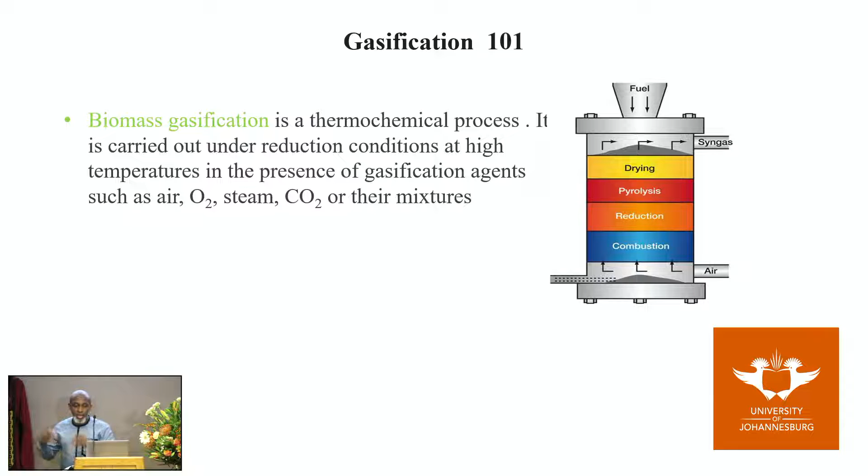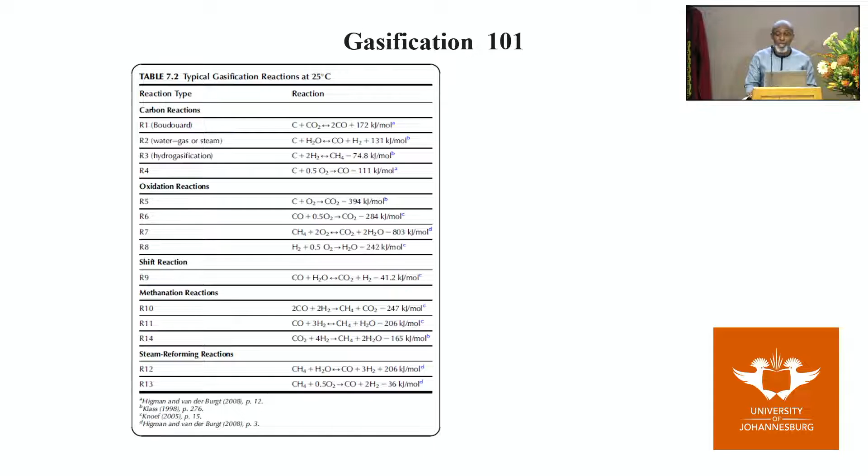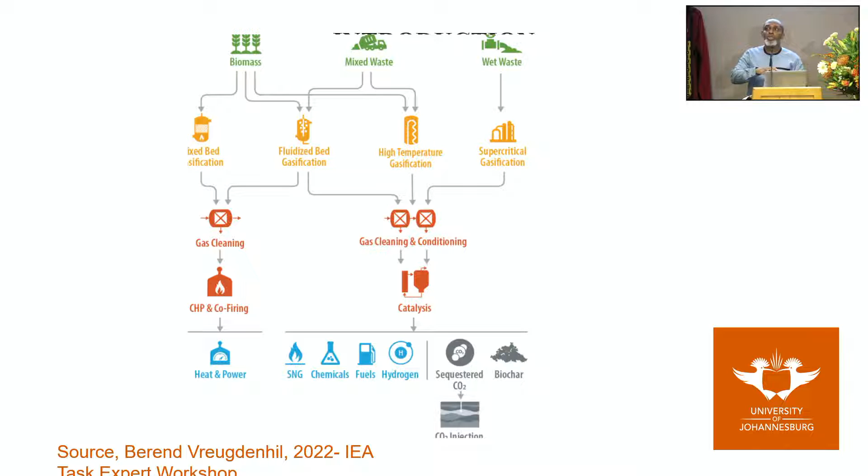There are a lot of reactions taking place in the gasifier: the carbon reactions, oxidation reactions, shift reaction, methanation reaction, and steam reforming reactions. And among the different types of gasifiers, the type of waste you have also dictates the kind of gasifier you select to extract your energy.

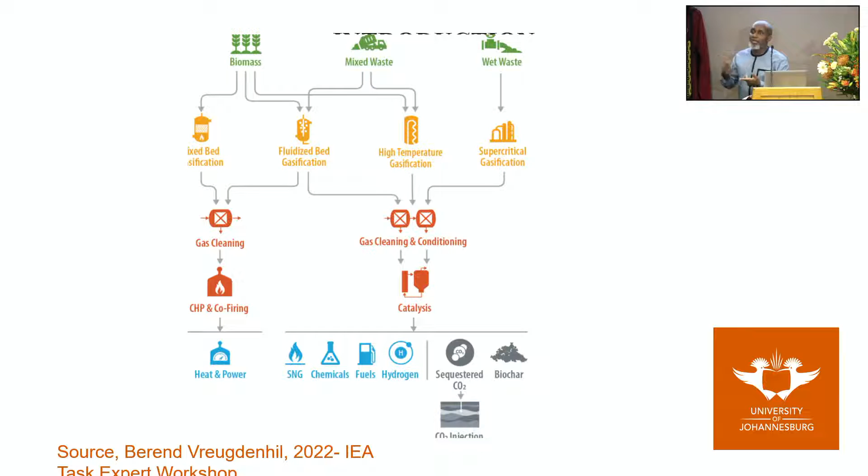So if you have pure biomass, you could use a fixed bed reactor or a fluidized bed reactor. If you have mixed waste, maybe municipal solid waste, you have paper, grass, plastics and everything, you could use a fluidized bed reactor or a high temperature reactor. But if you have wet waste, you use a supercritical reactor.

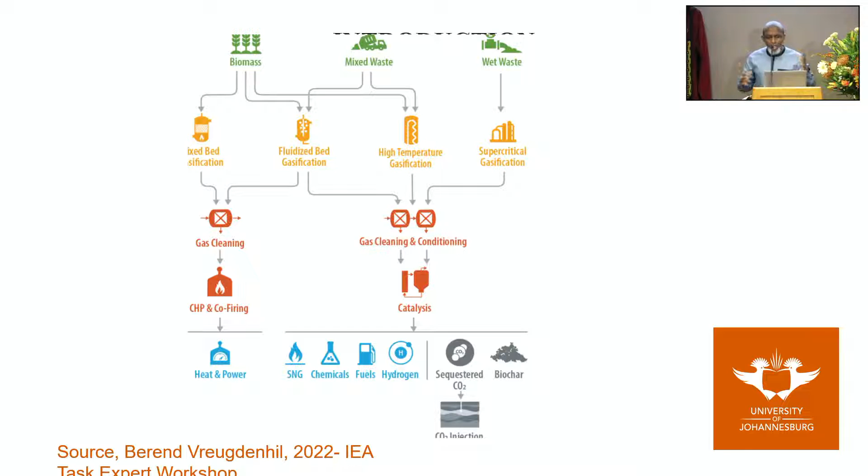And after you have gasified, the gas you get has a lot of impurities. You need to clean your gases, and you go through a gas cleaning process, a series of different processes. And that gas can be used for different applications. You can use it for combined heat and power, produce electricity, produce heat,

or you can use it to produce chemicals. You can use it to produce fuels, hydrogen, like the green hydrogen we're talking about. You can produce natural gas, and you can also capture your CO2 from the process. You can sequester it, or these days you can use the CO2 to produce chemicals.

The history of gasification and energy transition. Gasification has played a key role in energy transition for the last 200 years. In the early 1800s, gasification was used to produce town gas, which was used to light streets in London and also in North America and Maryland.

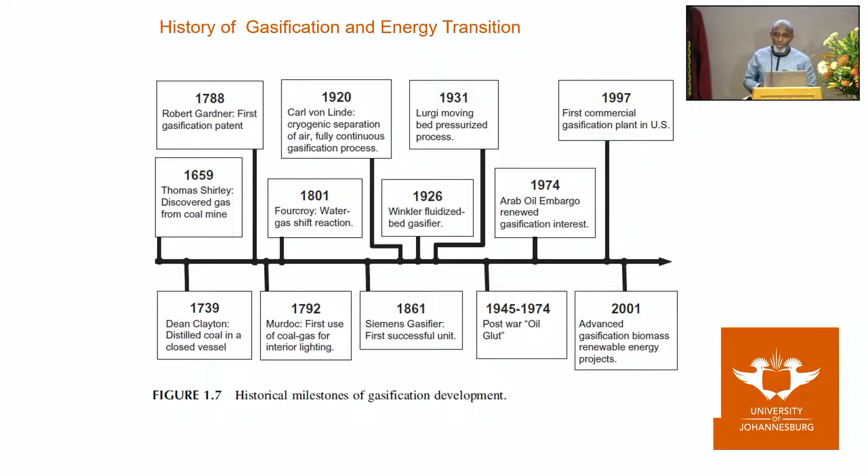After the internal combustion engine, gasification was also used to produce electricity. The product gas was used in the internal combustion engine to produce electricity. And during the wars, gasification was also interfaced with the Fischer-Tropsch process to produce transportation fuels. The syngas was used as a raw material to produce hydrocarbons for the transportation industry.

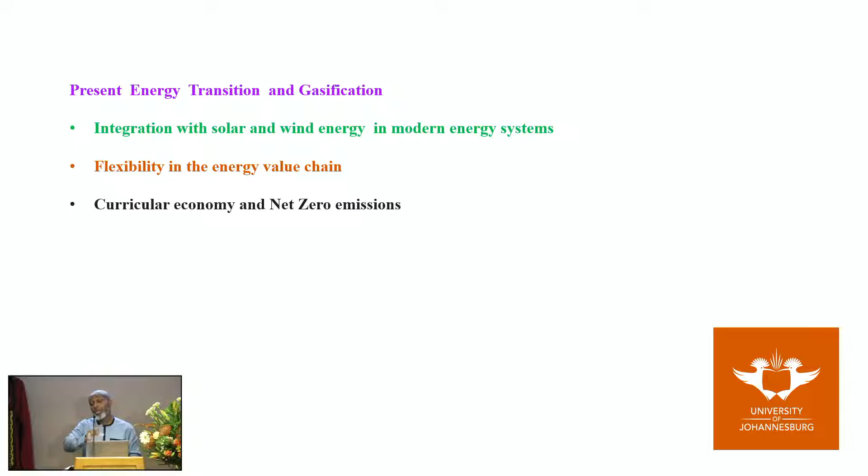And recently, gasification has also been adopted for biomass to produce renewable energy projects all over the world. And presently, the key one, which is the focus of this topic, is that gasification can be integrated with solar and wind energy in modern energy systems, either as storage or as a backup for load deficits, and also to achieve flexibility in the energy value chain, whether you produce electricity, heat, or gas. It can also be used to develop a circular economy and to achieve net zero.

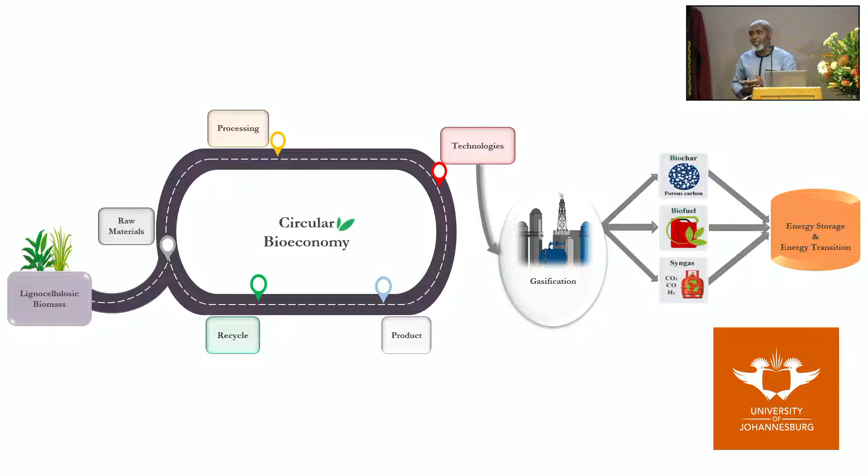In this case, the gasifier can produce what we call energy vectors, which have applications in different phases. It could produce biochar, which can be used for energy storage. It can produce syngas that can be used to produce electricity, heat, and transportation fuels. So that basically helps us to transition and be able to store energy, because variability of renewable energy is the key challenge in the penetration of renewable energy. So that transition will be easier, quicker, and cheaper.

So in modern energy systems like the one I've shown here, when you have excess renewable energy, because the challenge about renewable energy is that you produce so much, especially in the afternoon when you have so much sun, the demand is low. So generally, what a lot of people do, which is the easier way, is curtail it. You basically waste it, because storage technologies like batteries are still not at the level in terms of capacity. So there's a need for you to store to a very large extent. So power to gas is a very good concept.

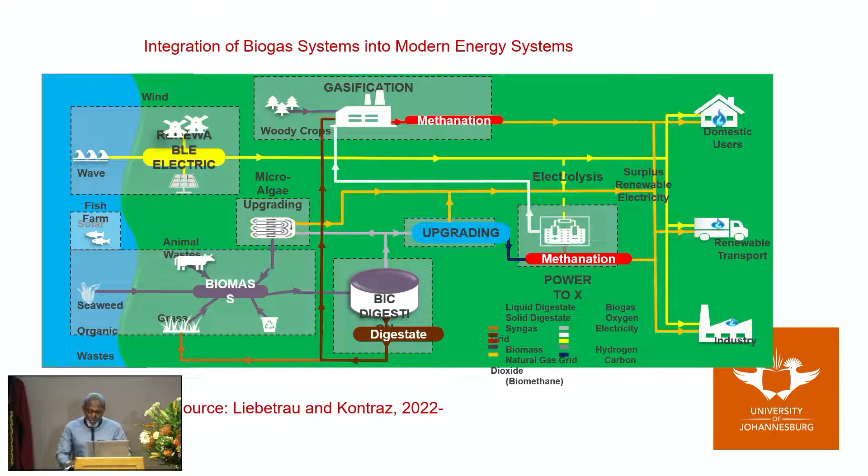So the gasifier can produce your CO2 and the hydrogen, so with the electricity you use to split water, you get hydrogen, and you can now store the hydrogen easier, or you can use it to produce methane, or you can use it to produce diesel or the liquid fuels. And these applications can be used for heating domestic users, or for transportation fuel, or as a heat source in an industry. It can also be used to balance the load.

Like you can see in that diagram that I showed here, that's the energy production and spot price in Germany, September 2022. You could see that the renewable energy load was not enough, so they had to balance it with electricity from a biomass gasifier. Or you can also use it to balance not only electricity but heat, especially in Europe where heat applications are in, and also gas in your gas grids.

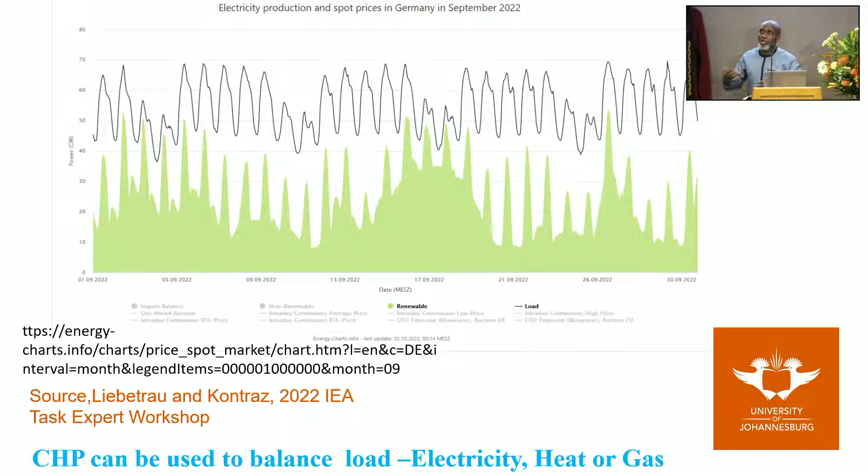In combined heat and power, how does it work? A biomass goes through a gasifier. It could normally be pre-treated. After a gasifier, it goes through a gas cleaning process and can be passed through a gas turbine to produce electricity, and the heat can also be recovered. So what that means is that there's flexibility in the system. You can produce electricity, you can produce heat, or you can produce both of them at different ratios, based on the spot market.

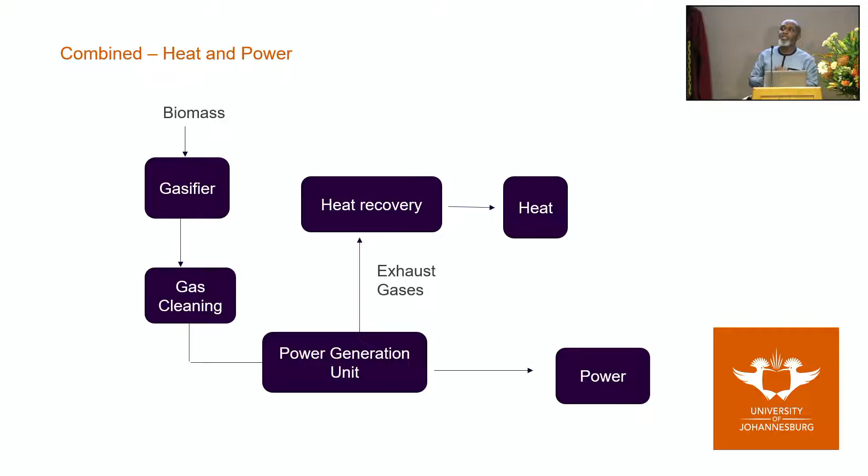Because going forward now, you'll be buying electricity like you're buying shares online. There's a spot market, because previously you pay at the end of the day, but you can do what you call a spot market, because the prices will be different, because of the storage, and it will be a challenge.

So if you were to improve the efficiency of that process, you can use the fuel cell. The solid oxide fuel cell is one key one for high temperature. So you improve the efficiency of the process, and you can also use it for heat storage. And you can also take that gas, clean the gas, to synthetic natural gas, and you can use it for different applications. So you can use it for mobility, in compressed natural gas in buses, or you can put it into the gas grids for heating, either domestic, residential, or for industrial heating, like Egoli gas that we see in Johannesburg here. So a lot of applications you can use that for.

And if you want to produce chemicals, you can take that gas, pass it through a catalysis process, and you can also shift that gas to produce hydrogen. You have your hydrogen, and you produce methanol, ethanol, your different hydrocarbons from your FT process. And these are called synthetic fuels, and they could be used for different applications. Especially recently, the focus has been on the aviation industry, where it's very difficult to decarbonize, and there's a lot of interest in producing synthetic fuels from this process.

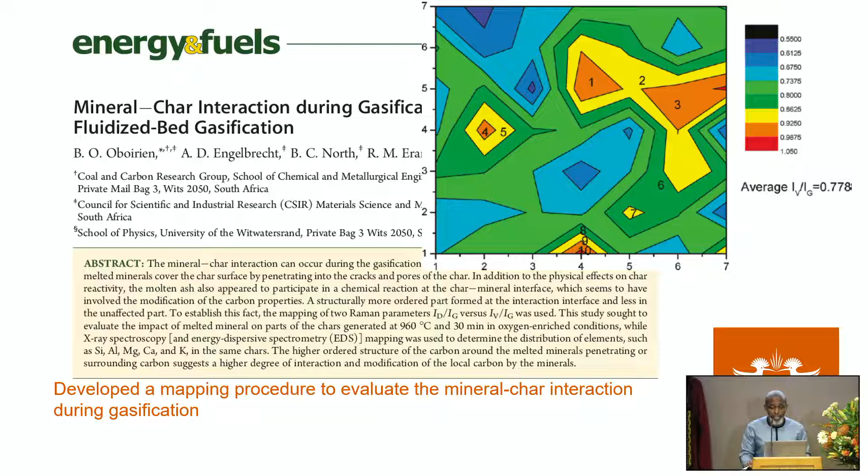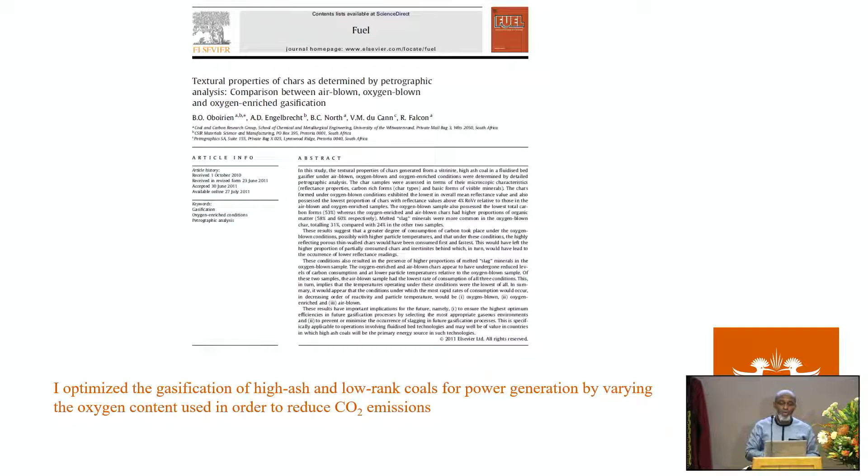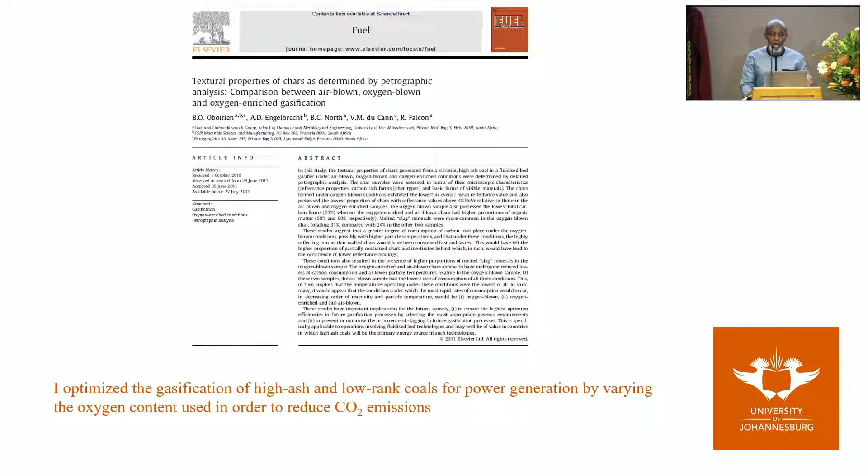And the last contribution was basically to look at gasification at different oxygen conditions. We looked at air-blown, oxygen-blown, and enriched-blown, and we saw that the properties of the chars also change. We were able to use this to improve our gasification efficiency and to reduce CO2 emissions, and we also published in Fuel, a high impact factor journal in the field of energy and fuels. We have received pretty good citations on this work.

Based on these learnings, I said that we can use gasification for any solid fuels: coal, waste material, biomass. So when I joined the University of Johannesburg, my first PhD student was to look at biomass gasification. But the challenge about biomass is that the energy density is quite low, and the moisture content is very high, very difficult to store, very difficult to transport. So there's a need for you to pretreat it.

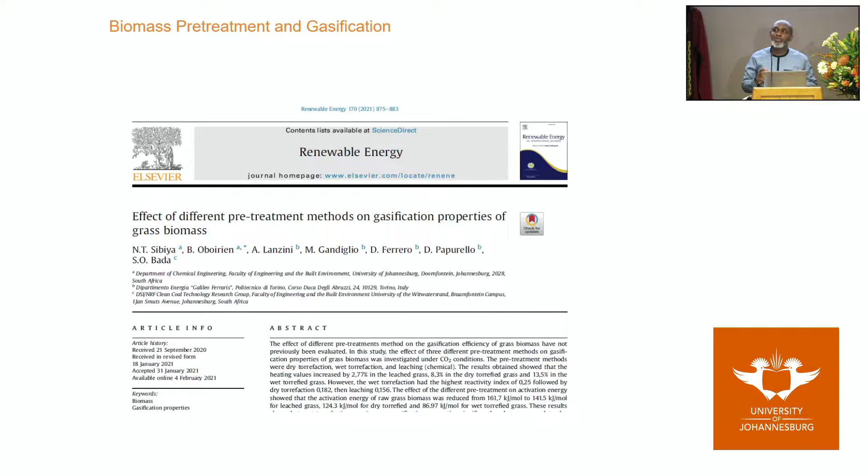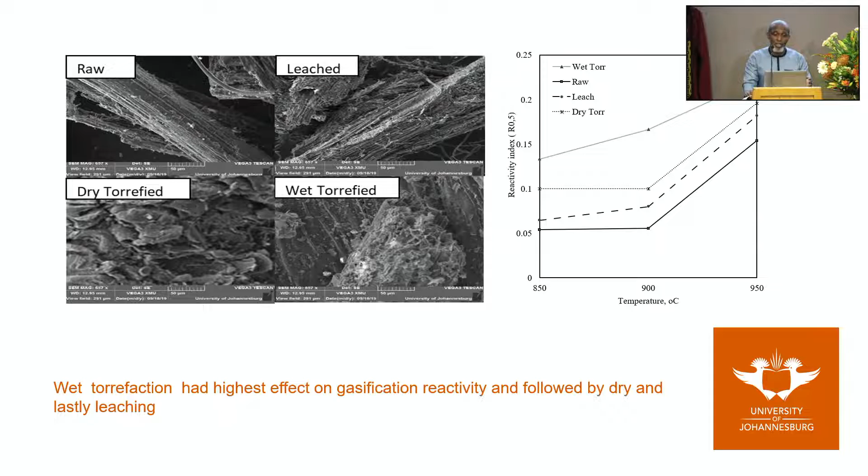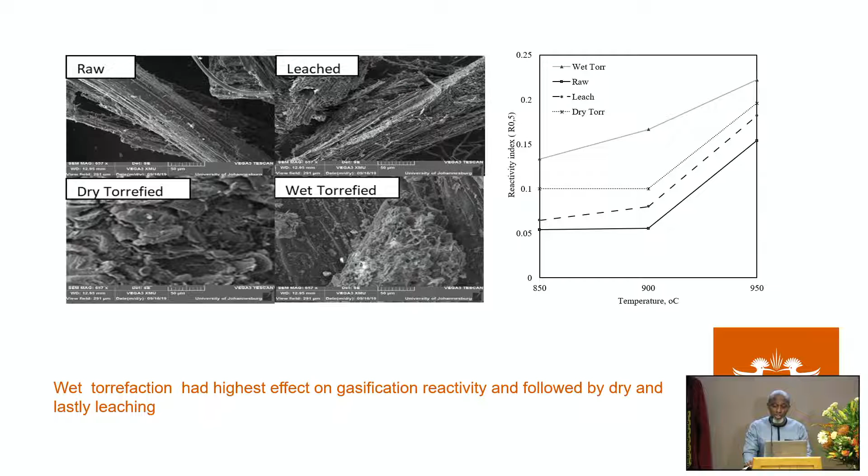And three different pretreatment methods were studied: leaching, dry torrefaction, and wet torrefaction. You can see from the same diagrams that the wet torrefaction has higher pores, followed by the dry torrefied biomass, and the last was the leached one, compared to the raw one. We evaluated this work using the reactivity index, and we also have similar results. We also got more than 20 citations in the last 2-3 years since we published this work.

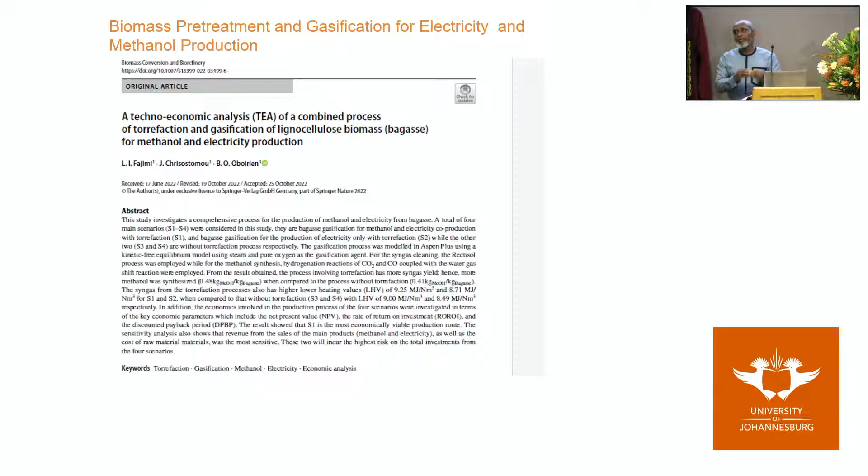And based on this, as chemical engineers, after you have developed a process in the lab, you want to look at the economic feasibility of that process. We had already established that torrefaction can improve the gasification efficiency. And when we gasify, the syngas is used as a feed to other applications. In this case, we wanted to produce electricity and methanol. So we developed a process model to look at the technical viability of a plant that produces both products, having torrefaction as a pretreatment process.

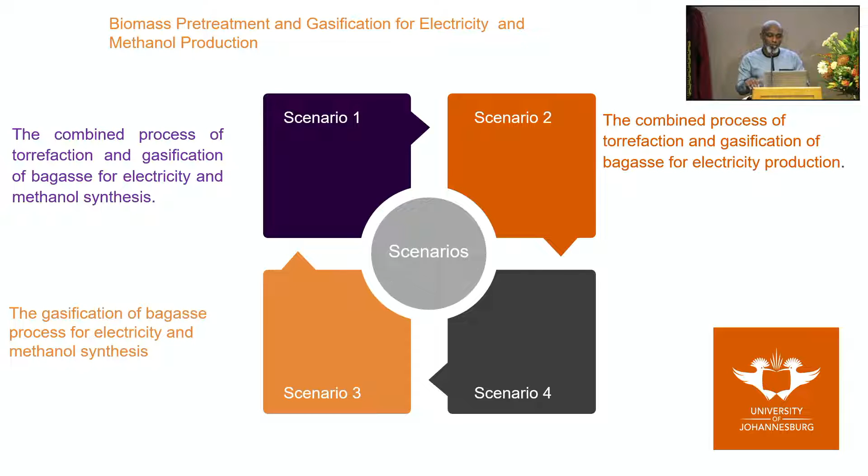So we had four scenarios. The first scenario was the combined process of torrefaction and gasification, producing electricity and methanol. The second one was combined torrefaction and gasification, but only producing electricity. The third one was no pretreatment, producing electricity and methanol. And the fourth was no pretreatment, only producing electricity.

The result we obtained was that torrefaction has a high influence on the yield of the syngas and also the heating value of the syngas. If you want to use it for electricity production and you have a higher heating value, you're able to recover more electricity and heat from it. And also with the ratio of hydrogen and carbon that you need for methanol synthesis, you're able to achieve that ratio. Your methanol production is also higher compared to without torrefaction.

And we observed that scenario one, which combines both torrefaction and gasification and both products, electricity and methanol, was the most viable economic scenario. And when we did a sensitivity analysis on the different variables, we saw that the price of methanol and electricity, as well as the cost of raw material, were the most sensitive factors affecting the financial viability of the process.

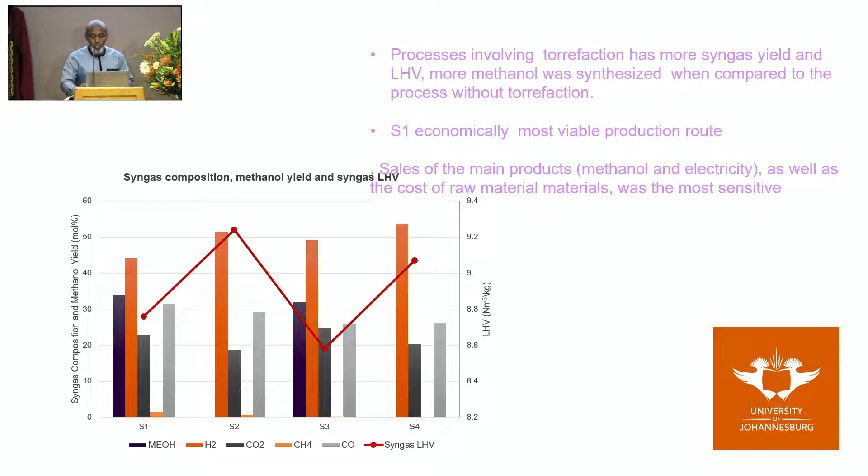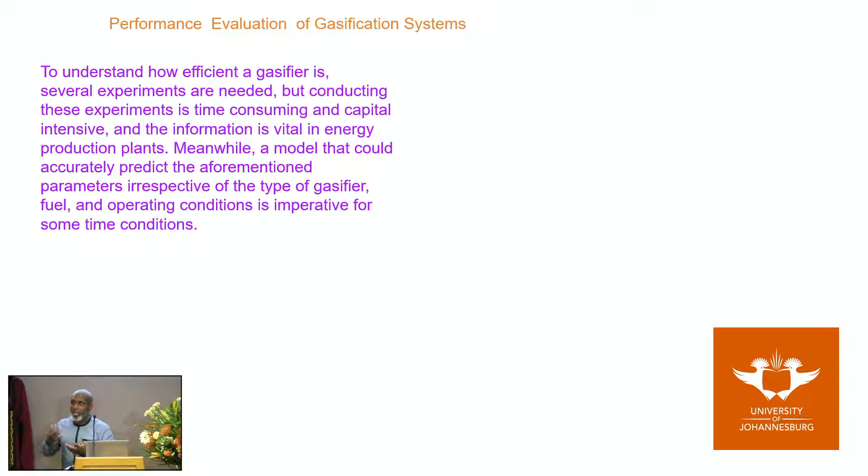The other contribution was that a gasifier, as I said earlier, has complex reactions happening in the reactor. There's a need to determine the performance of a gasifier, because if you want to design your plant, you need to know the amount of energy you can recover for your process. But the challenge is that you need to do a lot of experiments, which is time-consuming and capital-intensive. So there's a need to develop a model that can do predictions, since we have different types of gasifiers, different types of fuel and different conditions.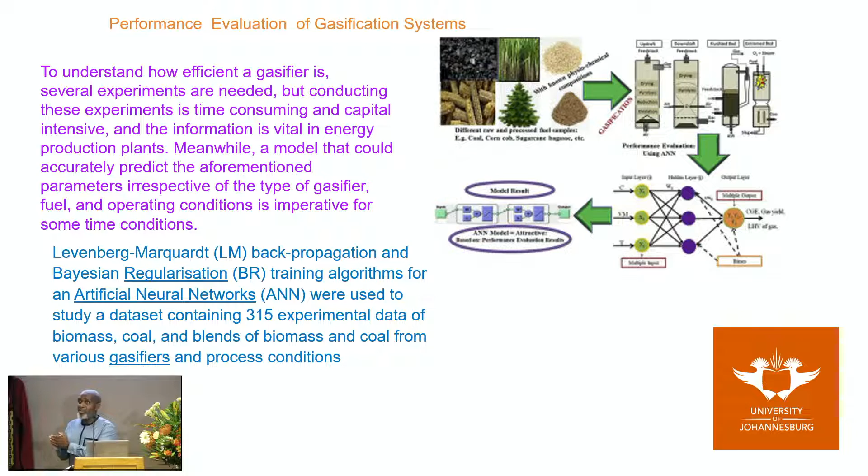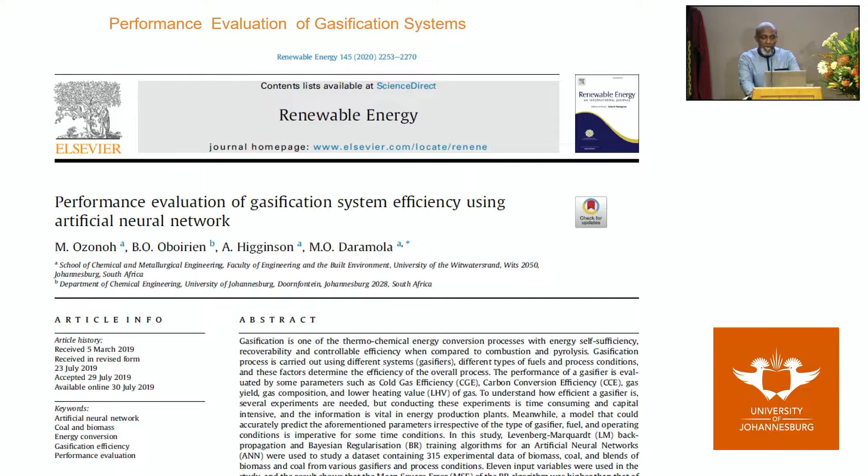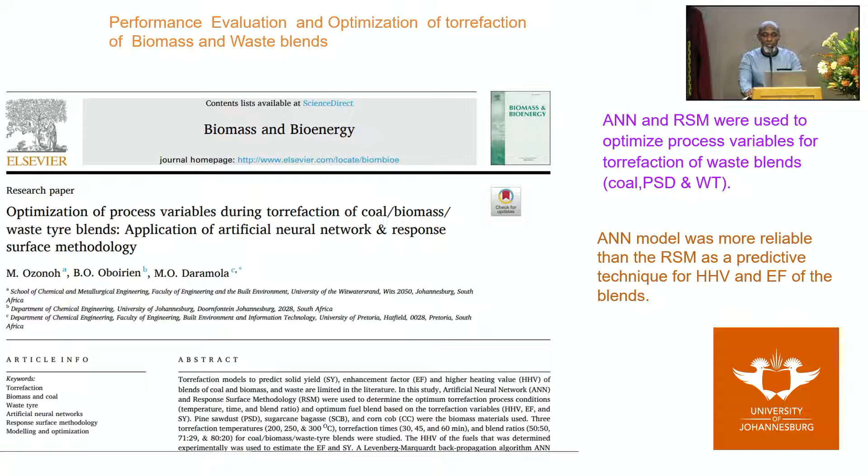And this work was published in Renewable Energy Journal, and we've received a lot of citations, high impact factor. We also did the same thing for torrefaction, because logically, if torrefaction is a key concept, can you also predict it? And in this case, we did not only do a prediction, we also did an optimization study. And we used artificial neural network and response surface methodology to look at the different ratios of our blends and our conditions.

Because why do you torrefy? You want to enrich it. You want to increase the heating value. You also want to increase the enhancement factor. So we saw that our ANN model was more reliable than our RSM model. And this work was published in Biomass and Bioenergy. These are key high impact journals in biomass energy work.

The other contribution, again, was gasification is one of the technologies you can use to recover electricity, heat, energy from waste. But there's also a biological process, which is anaerobic digestion. All over the world, you can either have a gasifier or you have an anaerobic digestion. But when we saw in the literature, the uptake of these waste-to-energy plants all over the world is quite low. So, can we combine both technologies and see if the economic viability will be different?

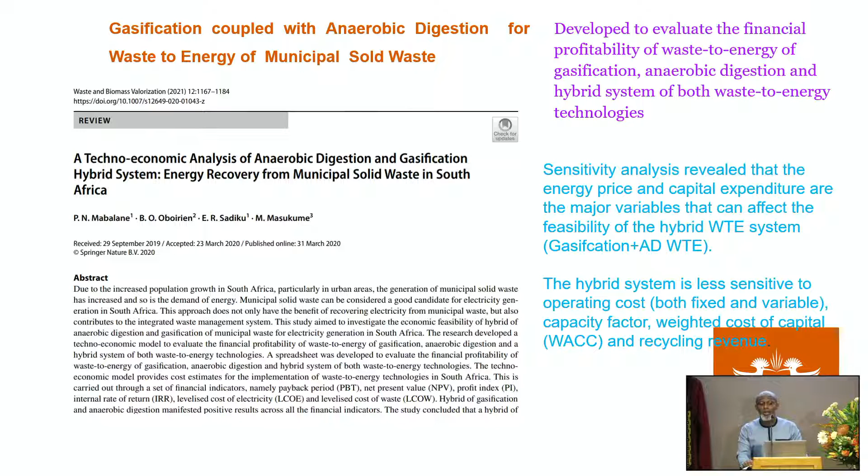With my master's student, co-supervised by Professor Sadiku, when I was at the CSIR, we developed a financial model to evaluate the efficiency of the hybrid system. We saw that the hybrid system, bringing them together, improved the economic viability of it, but the key sensitivity analysis variables that can affect the process are these. The energy price, the capital expenditure can affect it, but the variables that are less sensitive are your operating costs, both fixed and variable.

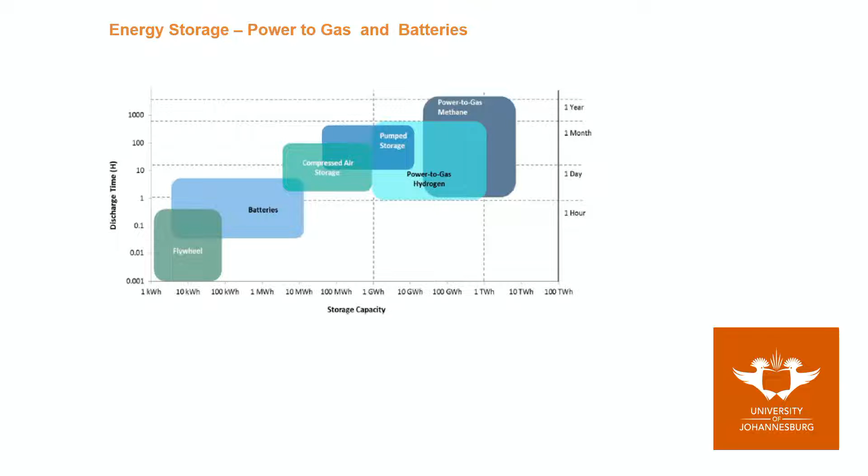And this work was published in Waste and Biomass Valorization, and we have received more than 40 citations in the last 4 years. So in terms of energy storage, I said earlier, there's a need for you to store your renewable energy. From the diagram I've shared there, you can see there are different technologies used for storage. Flywheels, batteries based on the capacity and the discharge time, compressed air storage, pumped storage, and power to gas, either to hydrogen or to methane.

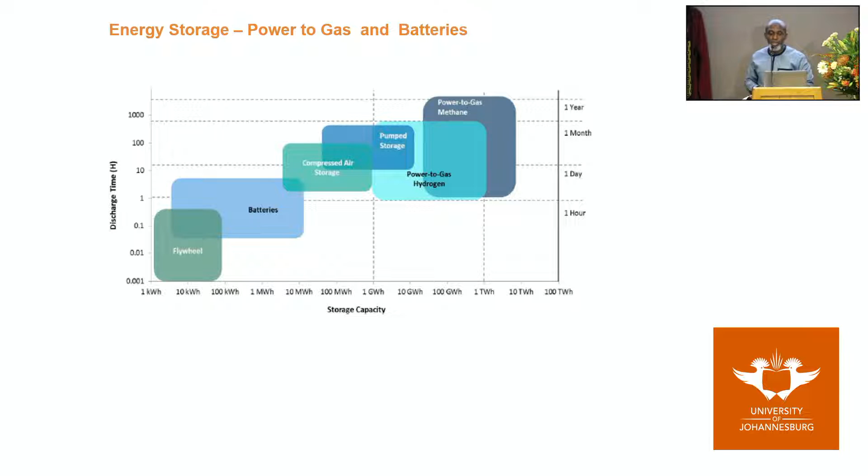So basically, how does it work? When you have excess electricity from your renewable sources, because you cannot store it easily, because the capacity of the batteries is not high, you use that, you split water through electrolysis, you get hydrogen, and hydrogen you can use directly in industry or for mobility, for hydrogen fuel cell vehicles, or for power generation, or for heat supply. But hydrogen is also a little bit difficult to store because of the flammability and some of the hazards.

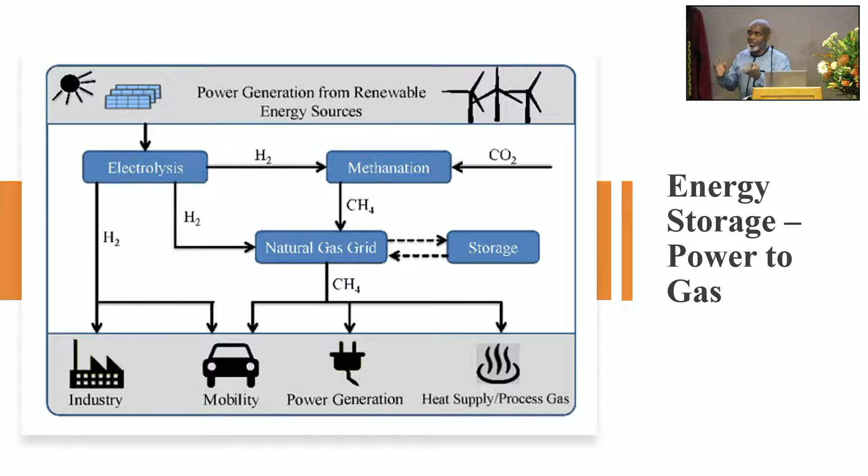So you could decide to react it with CO2 from a traditional coal power station through a methanation reaction, which is called the Sabatier reaction, to produce methane, and you can store methane easier. So you have either of those. You can also use it to produce liquid fuels through Fischer-Tropsch to produce diesel, kerosene, and things like that.

So we had to evaluate this for the South African road system. So okay, if we have excess electricity and we cannot store that, can we use it to produce hydrogen and methane for vehicle applications in South Africa? So we used a benchmark using the Integrated Resource Plan, one of the key energy planning tools in South Africa for renewable energy, and we calculated the surplus you're going to have, and said, okay, how much hydrogen and methane can you produce in that process?

And we basically matched it with the demands of the vehicles. In South Africa, we don't have fuel cell vehicles presently, but a lot of applications are more on the forklifts and trucks in the mines. While for compressed natural gas, we have buses in Pretoria and in Johannesburg.

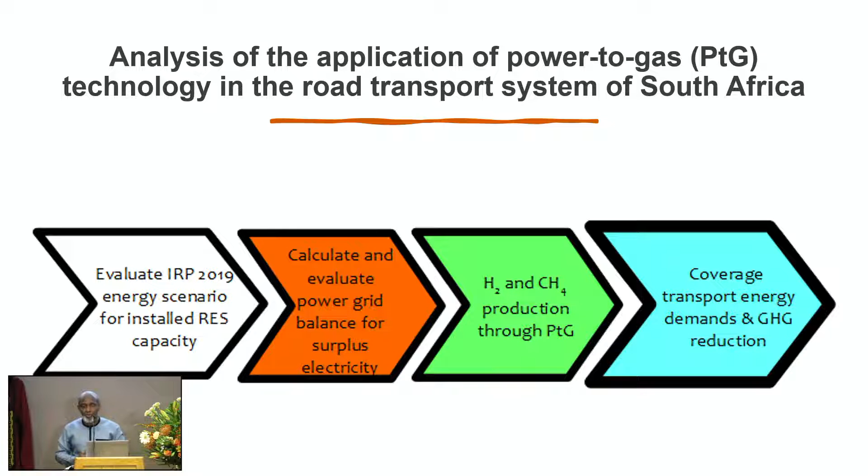And this was supervised by myself and my co-supervisor here, with my PhD student who's running his PhD here at the University of Johannesburg. We recently published the result in Sustainable Energy Technologies and Assessments, high impact factor. The resource assessment of the future based on the IRP 2019 reveals that we can generate about 13 terawatt hours of surplus renewable electricity. And we can see that now, even in South Africa, especially the places where you produce renewable energy in the Northern Cape and Eastern Cape, there's a great constraint.

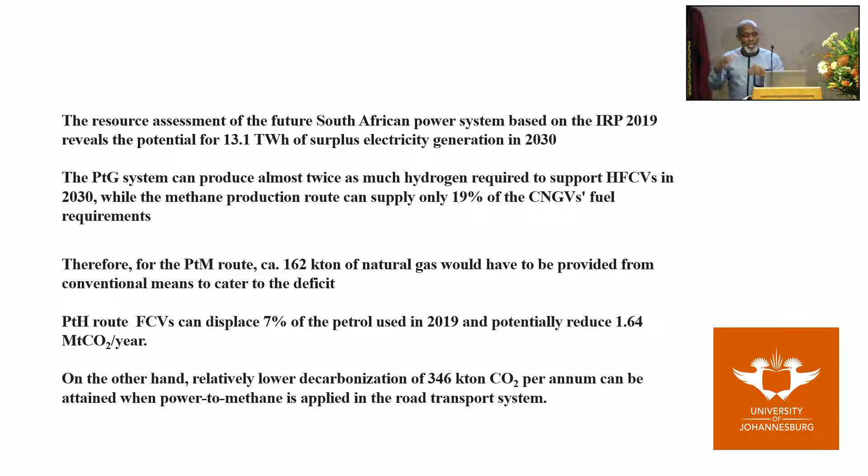And there's a need for you to store. Either you improve your grid capacity, or you store them using power to gas, which is what we recommended. So we said, based on our calculation, based on that amount, you can produce twice the amount of hydrogen you require to support your hydrogen fuel cell vehicles, while you can only meet 19% for your compressed natural gas vehicles.

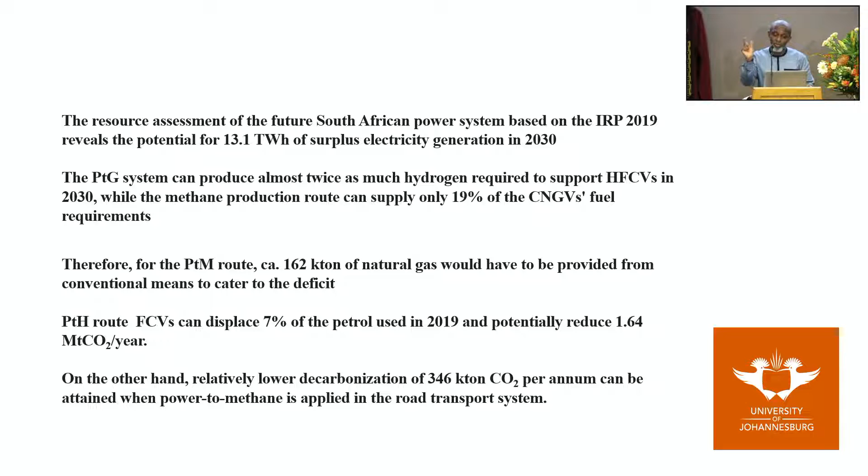So there's a need for you to now import about 162 kilotons of natural gas to meet that shortfall, that deficit. But in terms of your emissions, for your hydrogen fuel cell vehicles, you can displace 7% of the petrol used vehicles based on the 2019 figure that we used. And you can also reduce emissions by about 1.6 megatons of CO2 per year. But you have a lower one for your methane, about 346.

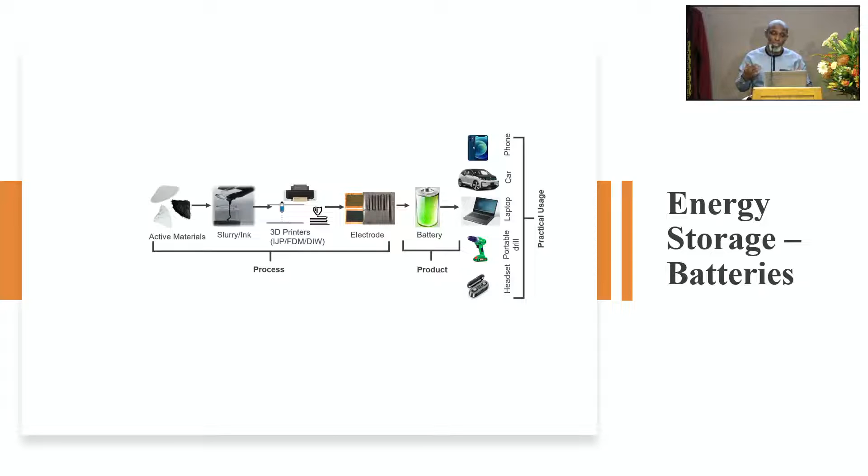So the other part of it is in terms of the material part. I said we're working on power storage and we're working on batteries. In batteries, our key focus is anode materials. I work with Prof Ndungu, who I think is in the audience here. We're co-supervising a PhD student. A traditional way of producing anode materials could be through traditional wet chemistry, or you can also use the new technology now of 3D printing.

So the first was to basically look at the literature and see what is in the literature. We saw that there are challenges. Even though 3D printing has a lot of advantages, like you can produce it in one step, you can control the structure, you have a lot of challenges in terms of the material, your slurry component, and also your applications. And this work was published in the Journal of Power Sources, a high impact factor journal in the field of batteries and energy storage.

And the other contribution was with my undergraduate students. We tend to achieve resource efficiency. We look at coal waste. We say, okay, South Africa has been using coal to produce electricity for a lot of years. There's a lot of discard coal. Can we use that waste material to produce anode material for batteries? And also coffee waste. We put it through a carbonization process, and we were able to test the CVs.

And we observed that our discard coal has a higher intercalation of lithium ions than our coffee waste. And that means it has the potential to work as a more effective electrode than the coffee waste.

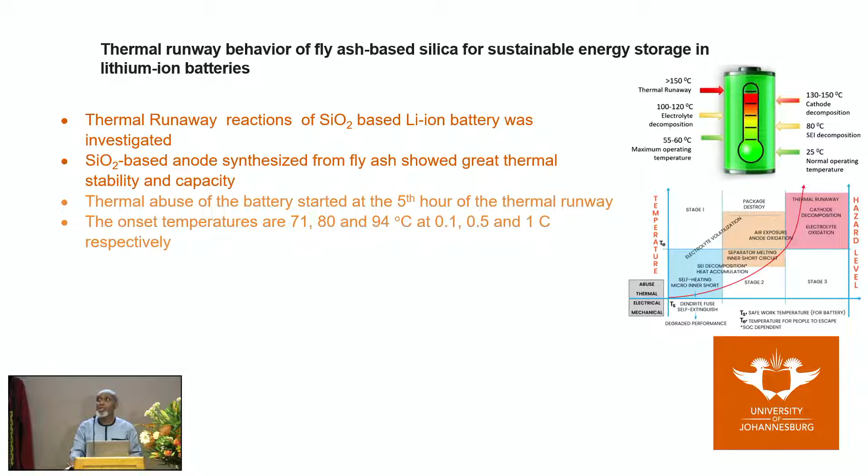So the electrode can be a carbon source, and it can also be a silica source. So the PhD student synthesized a silica-based material and tested its thermal stability. And we were able to establish that the thermal abuse of the material we synthesized started at 5 hours, and the onset temperatures were about 71 to 94.

My contributions, my teaching philosophy: I try to have a nexus between my research and my teaching. Most academics will say research influences teaching, but I have seen that teaching also informs my research. So I've used my expertise in process modeling and energy systems to improve my teaching, for the undergraduate courses I teach, and also in the honors courses I've taught.

Based on my research expertise, I've introduced 2 innovative topics in my honors design, energy and power integration for energy efficiency, because energy efficiency is the key instrument in transitioning to a low carbon energy system.

And also, I've introduced life cycle assessment, because the key drive now is what they call sustainable energy design. And one of the tools we use as chemical engineers is life cycle assessment to evaluate a sustainable design. And I prefer project-based activities.

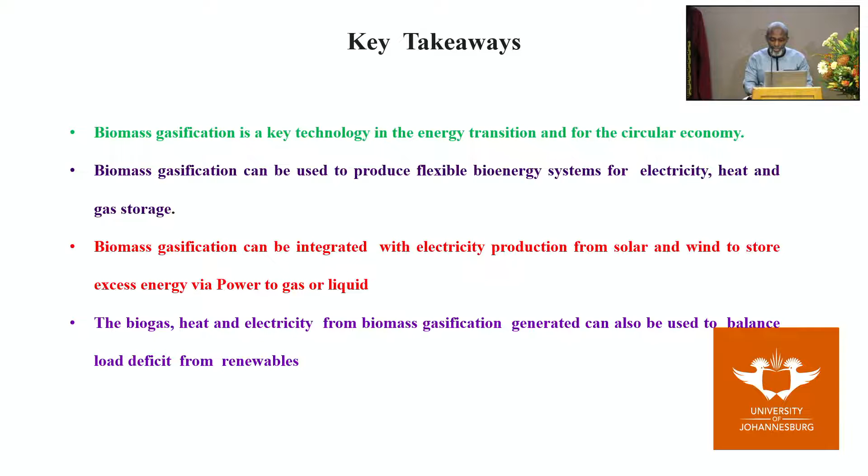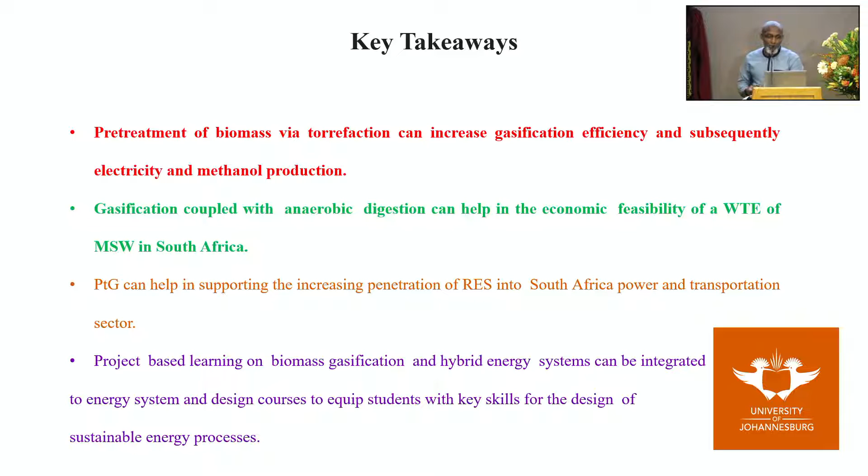The pretreatment of biomass through torrefaction can increase the gasification efficiency, and subsequently can also increase electricity production and methanol production. And gasification can be coupled with other technologies like anaerobic digestion to help the economic feasibility of waste-to-energy plants in South Africa.

It can also be used to increase the penetration of renewable energy in South Africa's power and transport system. And also project-based learning on gasification and hybrid solar and gasification systems in our energy system or design courses equips students with key skills for the design of sustainable energy processes.

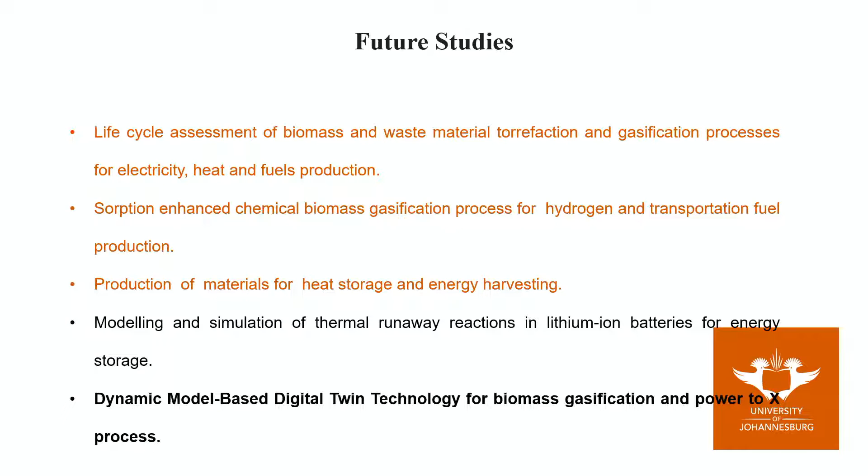And just like the VC mentioned, this lecture is not the end. So I'm not going to stop working. The future studies is that we've established that torrefaction can assist gasification to produce different energy products: electricity, heat, and fuels. As chemical engineers, we need to carry out life cycle assessment of the process, and my final year student and my master's student are working on that.

Also, in the gasification process we produce hydrogen, but the purity of hydrogen is not as high as we want. There's new research looking at what they call sorption-enhanced gasification. We're looking at that with my master's student and my collaborator at Politecnico di Torino in Italy. We're also looking at producing materials for heat storage and for energy harvesting, so you can harvest energy from mechanical processes.

And as I said, we're working on batteries. We're looking at modeling and simulation of thermal runaway reactions in lithium-ion batteries. And lastly, we are also looking at developing digital twin technologies for biomass gasifiers and for power-to-X processes.

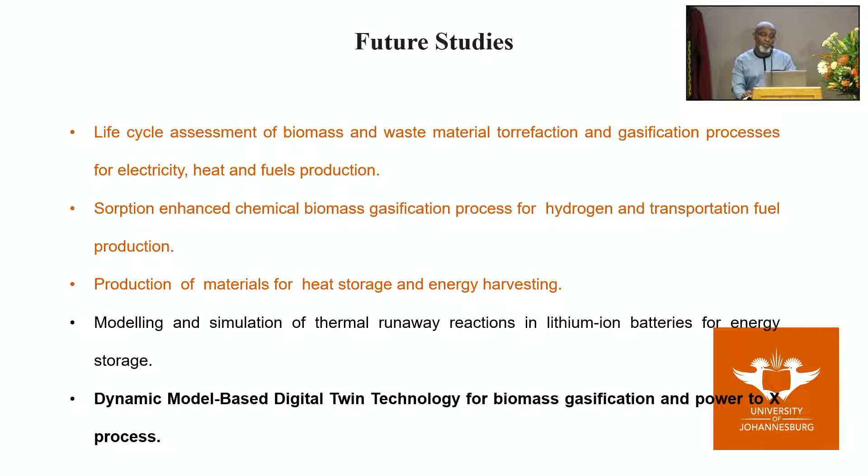Vice Chancellor, I've finished my lecture. I would like to acknowledge the people who have played a key role in my career. I will start by dedicating this talk to the memory of my late wife, Dr. Kafayat Oboirien, who passed away in 2019 after a long battle with cancer. Your sacrifices and support in my life will surely not be forgotten.

I would also like to thank Almighty Allah for His favors, guiding me against all odds in my academic journey. I also like to thank my teachers from primary school, high school and university, who invested in building my education foundation. I also want to thank my PhD supervisor. I'm indebted to her for allowing me to grow as an independent researcher.

I would like to thank the late Professor Bilainu Oboirien, my professor in Nigeria, who assisted in starting my career. And I also want to thank Dr. Brian Knott, my mentor at the CSIR, who guided me at the beginning of my working career. I also want to thank the CSIR for granting me a PhD studentship and opportunities to start my career. And I also want to thank Professor Sadiku for mentoring me.